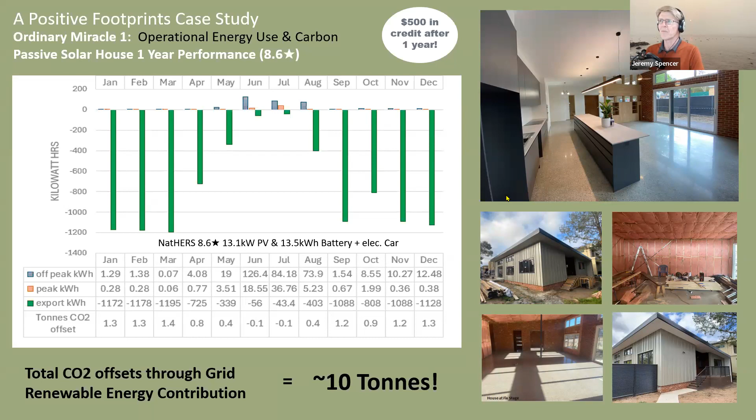For those who didn't see part 1, this is the case study home and this is its operational performance. As a quick refresh, this is an 8.6 star passive solar home. It produces more power than it uses, it's $500 in credit over the year and offsets 10 tons of carbon dioxide, basically by minimizing demand, welcoming in the sun during winter, keeping it out during summer, and then putting photovoltaics on top. That's what we went through, how to do that in a cost-effective way, and how to use the SBA website, where the tools are located for you to also do that if you're not already. They are relatively easy steps to follow.

The takeaway for me from last week, when I saw this, it sort of changed how I see what a net zero home can be. A net zero home for me now, just a refresher from last week, is a resilient home. This house produces so much power during the day but pulls very little from the grid at night. Effectively, there could be a blackout, and this house could go for days or weeks for most times of the year. Maybe not in the middle of winter, but most times of the year this house would be producing enough power to run itself without being a big demand on the grid when the sun goes down, because of its battery.

I see net zero homes as potential energy hubs during blackout times, where they can supply power to not only cars but neighbours' houses as well. I see net zero homes as low cost living lifestyles.

So instead of the average $2,228 in Victoria for a dual fuel home, this house is $553 in credit. And that doesn't count the $300 a year or so that it saves by not being connected to gas, and also the $800 a year or so that it saves by charging its electric car. So these numbers start to add up to some handy pocket money.

And lastly, a net zero home has a carbon negative footprint, offsetting 10 tonnes of carbon dioxide by putting excess power into the grid so that fossil fuels don't need to be burnt for that power to go into the grid, and in that way offsetting 10 tonnes instead of the average home, which creates 5 tonnes every year.

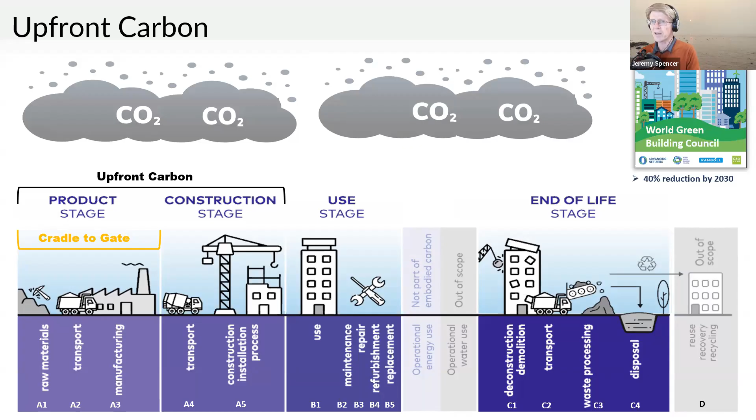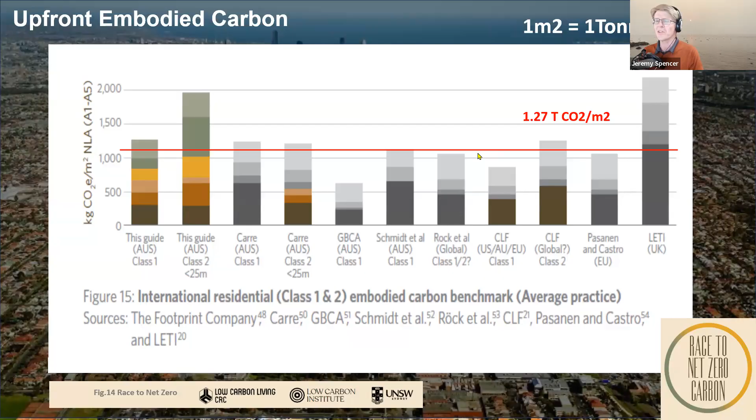And that's really because this life cycle analysis industry is still quite new, and the industry is trying to tie down what protocols, what data, and what methodologies are going to be used. But as a rule of thumb, as a working rule of thumb at the moment, until I know better, I go for this: 1 square metre of house is approximately 1 tonne of carbon dioxide. So if you're not doing any calculations, but you just want to get a basic idea, that's not a bad one to use on site when you're looking at plans.

Now today, I'm going to be using - I like this database. This is a free carbon coefficient database, which looks at products and the amount of carbon dioxide that they use, typically by weight. I've worked with this database quite a lot for the True Zero Carbon Challenge, the Design Matters National True Zero Carbon Challenge, where we created a front end to work with that database and allow us to run the challenge and produce reports.

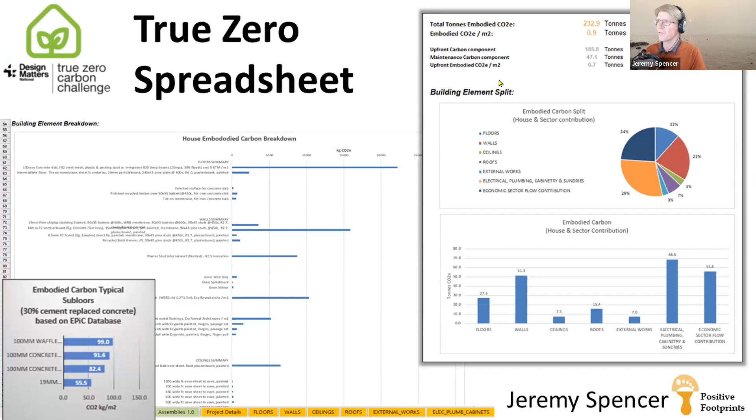Now, this is not the house as built. This is what I'm calling the base case home - one that uses the standard materials in the Melbourne suburban environment. So most houses around here are built with new brick, and they'd be built with virgin concrete, and probably for the floors we'd have carpet in the bedrooms, tiles in the wet areas and the living areas. You can imagine this house - the actual house form stays the same, but I'm just substituting in those materials. The reason I'm doing that is so that I can show you, as we go through this and apply some of the strategies to lower embodied carbon, how this relates to more standard construction.

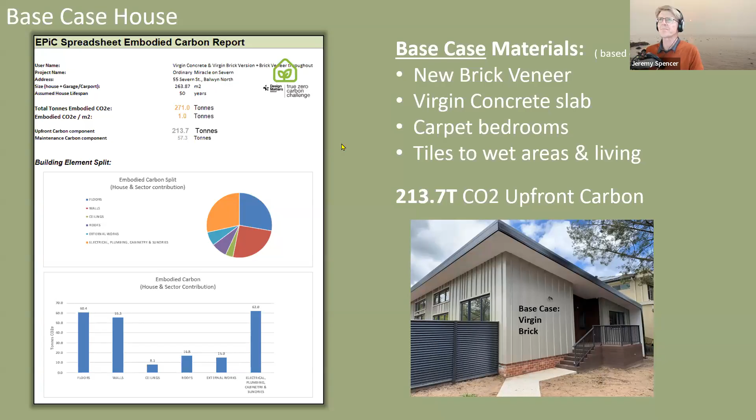On the report, once I've inputted everything, this is 213.7 tons of carbon dioxide for this standard house. This is how we break it down.

We've got floors here, around a bit over a quarter of the embodied carbon goes to floors. To get an idea of this particular house, it's a reasonably complicated flooring system. We had a sloping block, starting at the high end with a slab on ground sitting on piers, a waffle slab. As the ground sloped away, the owners wanted the house to be all single level since they were elderly. So we've got a brick strip footing, double brick over concrete strip footings, and running up the middle, little brick piers with I-beams over the top, which carries a Bondek slab over the top. There's also one other concrete section, which is a slab on ground.

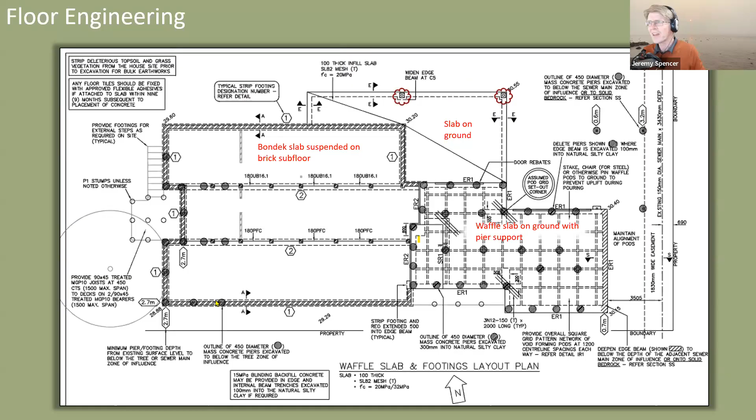We saw it in part one. This is thermally broken because it's actually on the outside of the house with a deck over it, and that was sloped so we could try and stop what was a drainage issue on the site. We had water that would sometimes run down the hill and flood the house, so we didn't want to create a deck with a space where all that water could sit and stagnate and need pumps and so forth. So we put a sloping slab to slope it away. Anyway, that's the flooring situation in this house.

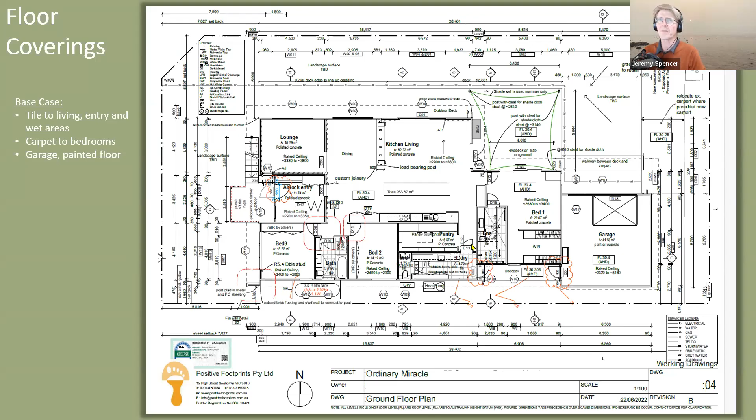On top of that subfloor, for the actual home, we end up doing polished concrete, which we'll look at. But for the base case, this includes tiles to all the bathrooms, tiles to the living area, and carpet to the bedrooms, which is what a standard house would have. If you're looking at standard homes, that's probably what they'd have, plus a painted garage floor. That gives us our embodied carbon for our floor of 60.4 tons.

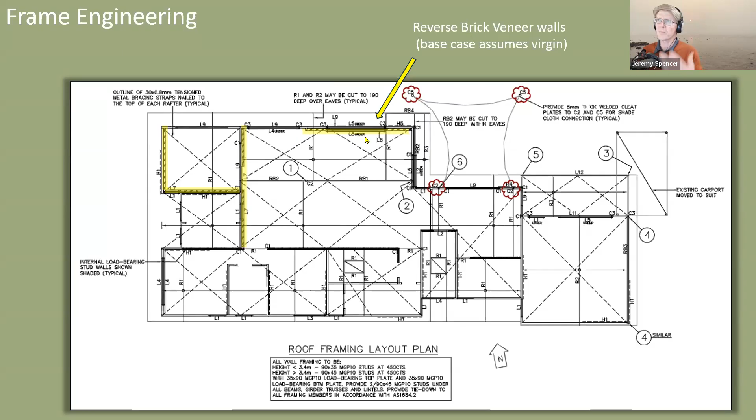Walls, 55.3 tons - again a big quarter of the embodied carbon in this home. These are probably pretty similar for most homes, so if you want to get a sense of how much embodied carbon and where it is in the home, these ratios are probably pretty similar across most homes. For the walls, we have timber framing throughout this house - that's standard. This house in particular had some internal brick walls, which in reality we use recycled brick, but for the base case we're assuming they would be virgin. We're also assuming for the base case that it would have been brick veneer, so we can see the difference later of changing it away from brick veneer.

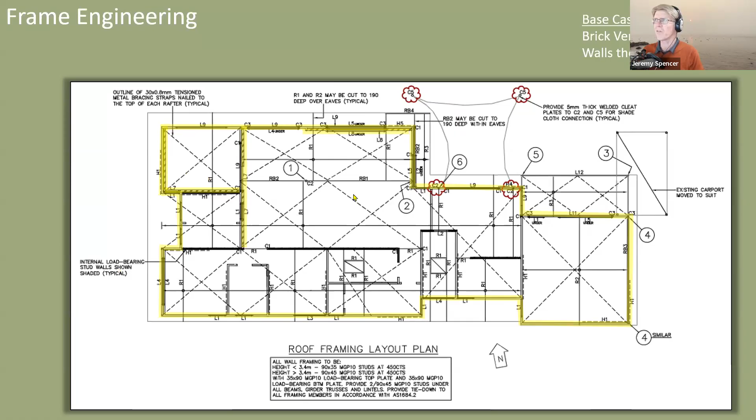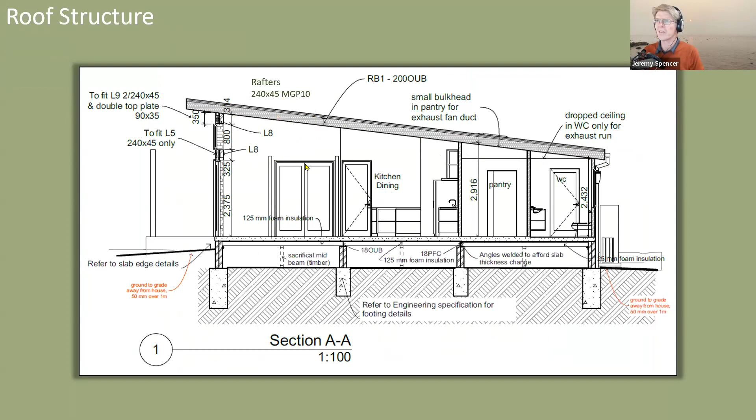Then ceilings and roofs - in the software I split those up because it's easier to enter, since ceiling size and roof size is different, and you can have different materials on both. But as a group, ceilings and roofs is our structure. We just have a flat framed roof throughout, 240 by 45 rafters - can't remember if it was R4 or R5 in that space. Plaster on the underside, metal roof on top. Pretty standard sort of construction there.

Now these four elements - floors, walls, roofs, and ceilings - are what they call cold shell. So if you hear this when anyone's talking about embodied carbon, cold shell just refers to those things. There's more that happens in the house, and you can see the cold shell in this case is about two-thirds of the embodied carbon. We've still got external works, typically not part of cold shell analysis because external works can sometimes be very broad, sometimes small, so they often just seem to be left out.

And also this plumbing, cabinetry, and sundries section. Now that's quite a big section when you put it all together, and includes wires, pipes, lights, switches, plumbing, toilets, basins, and basically all the other bits - cabinetry, bench tops, all the other bits within the home.

Now as far as data goes, you have pretty good data for walls, floors, ceilings, and roofs. But when you get to complex items like air conditioners and hot water systems, there just isn't the data - they're such complex machines. I was listening to a presentation from someone at Daikin, and they were saying that in their aircon there's over 2,000 pieces that come from all around the world, different places, to be assembled.

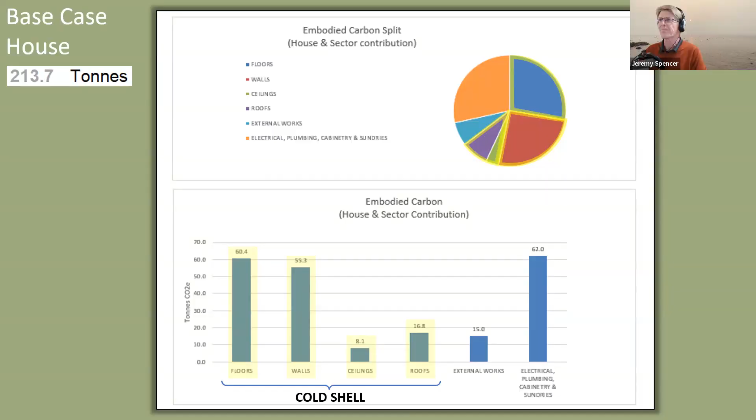All right, let's get into it. Now that we've seen what the house is, let's get into the principles to minimize embodied carbon, which ones we applied on this job, and what savings we got from that.

On our website, step 2 is all about specifying low impact materials, and it's all about embodied carbon. Halfway down the page, if you click on principles to minimize embodied carbon, you'll get a list of principles, and those are the ones we're going to go through now. I recommend you go back later and read properly if anything interests you. There's a lot of links within these to different resources on the internet, and a lot of tips in there. Okay, let's go through the principles.

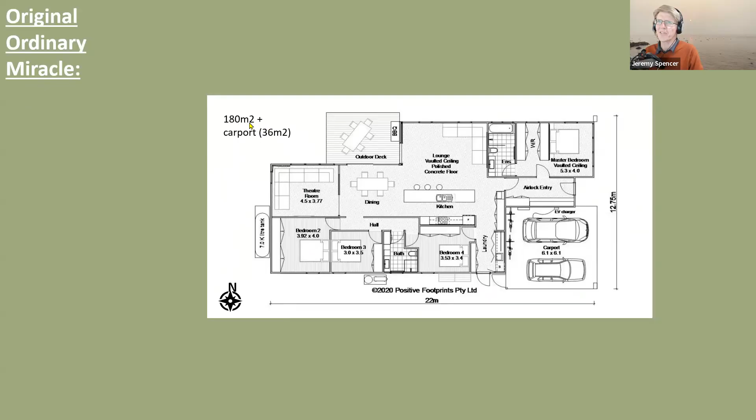Principle 2: avoid building bigger than you need. The clients came to us wanting to install the Ordinary Miracle, one of our Carbon Zero series. In their case they needed to flip it, and they flipped it but also increased it a little bit. The original Ordinary Miracle was 180 square meters plus carport. They enclosed the carport, made it into a bigger garage, and did a bit of pushing here and there on the walls, and before you knew it we were at 263 square meters.

Now, this is how they liked it, and they had some quite set ideas. But as a principle, we want our homes to be as efficient as possible. We want the spaces that the clients want, but we don't need more than that, if you know what I mean. We want spaces that work without having what I'm coming to call 'flabby homes.' I'm finding that's a really useful term—if you're trying to talk clients down a little bit, you can start saying the design is a little flabby.

No one likes flabby design. If I was able to potentially do it again, though the clients—we did have these conversations with the clients, and this is how it ended up, and that's just how it is. But I could see that we could quite easily take a scalpel to this and cut off 0.5 to 1 meter across the top there, maybe across that bedroom, and maybe across the back of the garage. But it's horses for courses, and each client is different.

But if we could have done that, we could have potentially saved 20 square meters or so out of this design. That's approximately 20 tons of savings with our rule of thumb, and maybe $2,000 a square meter—mainly, that's not our square meter price everyone, we're just taking out floor area here. But that's a reasonable saving: 20 by 2,000, that's 40,000. If you do that on a project, all of a sudden you've got a lot of money to put into appliances and PV. We weren't able to do it on this job, but that's the principle.

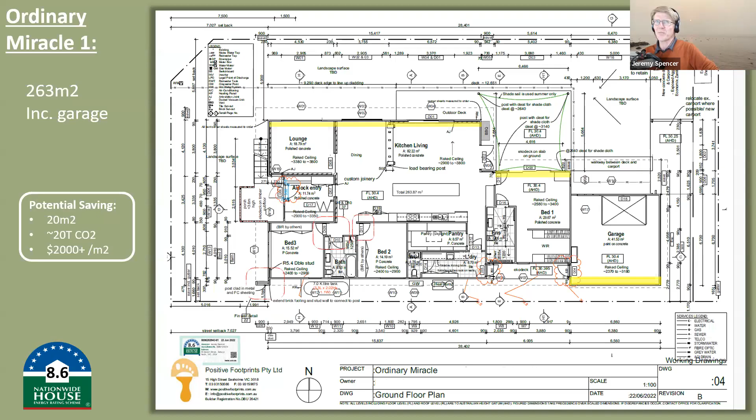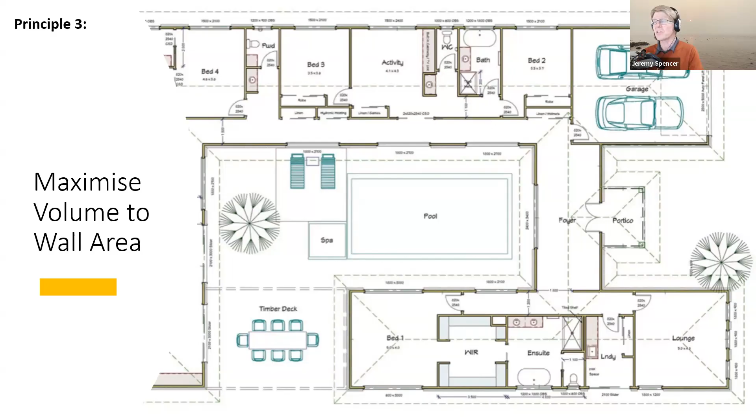Okay, principle 3: maximize volume to wall area. Different shaped houses can have different amounts of surface area relative to the volume they hold. Obviously, a square or rectangle has a pretty efficient amount of floor space to wall space. As soon as you add in a lot of courtyards, you end up with a lot of material for less volume of actual house inside. So one way to minimize embodied carbon is to minimize the amount of material in the house and rationalize the space a bit.

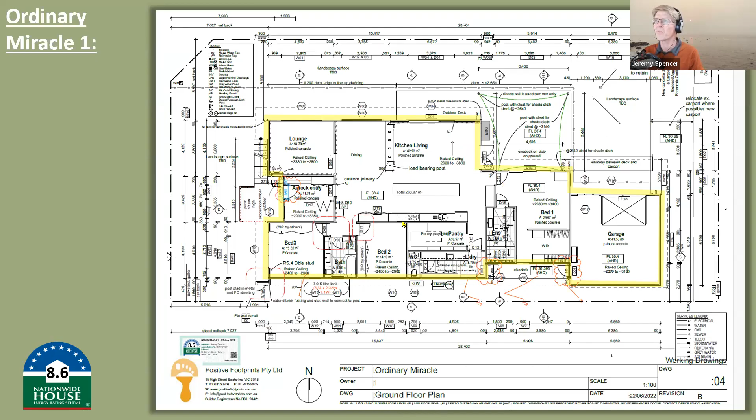In our house—let's see, this is the outside of the house—look, this is reasonably rational design. It does have a courtyard here. That courtyard, however, is facing east, facing the winter sun, so it acts as a light court to warm up in winter when the shade sail is out. I'd say this has a reasonable form factor, so give it a bit of a tick for that one.

But if you had a design with lots of ins and outs, lots of courtyards and turnarounds, it might be something you want to just discuss with the clients. It also obviously cuts down costs whenever you cut down wall area and the windows associated with that.

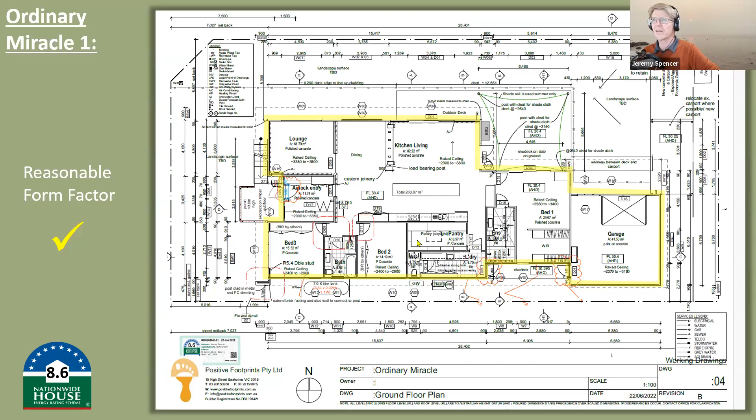It's not necessarily going to save you money. Something like this, in a domestic environment, takes a lot of communication with different trades to get their rough-ins nice and neat. A lot of them are not used to having their pipes and wires on show. So it can be done.

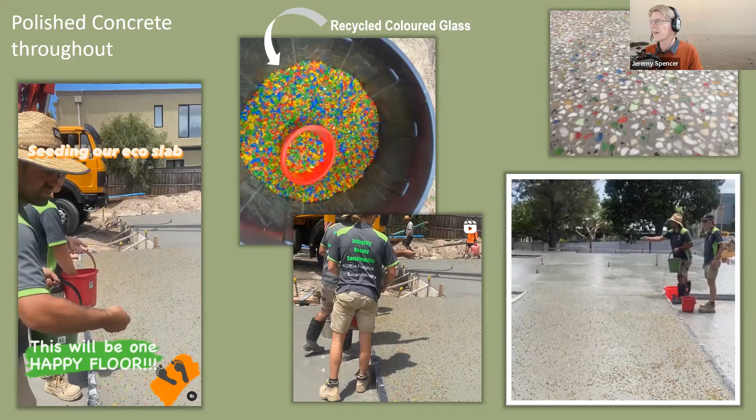In our instance, though, we did something that's maybe easier in some ways, and that is to simply take off the floor coverings against the base case house. In fact, our clients were quite eager to do as much polished concrete as they could. We used recycled glass from Schnipper Glass, threw that on for a happy slab throughout.

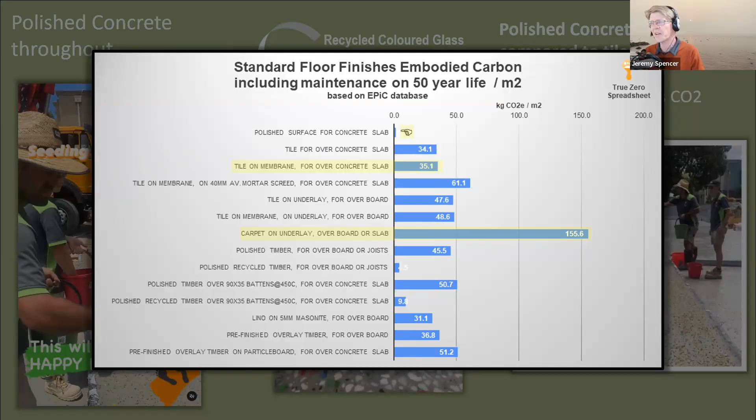That's partly because this iteration of the True Zero Carbon spreadsheet also included maintenance, and over a 50-year lifespan you might expect to change the carpets up to 3 times. So that's why carpets are quite high to begin with, but of course if you multiply by 3 they become quite a lot higher, whereas polished concrete is going to last for basically the lifespan of the house. It might need a rebuff, but that's minimal energy use.

So doing that strategy—minimizing that material, which we did on this house—we gained polished concrete throughout: minus 6.7 tonnes. This is a little tally that I'm setting up, and as we go through, if there are any strategies that we did do, I'll show you what sort of savings we got putting it through the EPIC spreadsheet there.

Principle 5 is reuse materials from demolition. Now in this case, this isn't actually the house, but we often do reuse bricks, and that is what we did in this case.

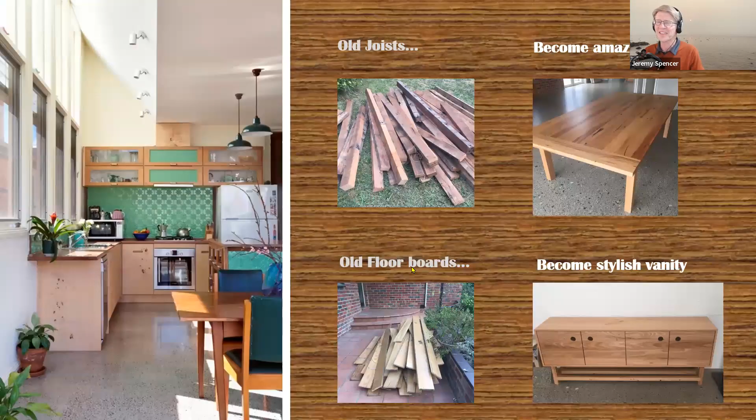Other things you can reuse - again, not this particular home, but for this principle - this was a house where we tried to reuse recycled cabinetry for the kitchen. Came out beautifully. Not necessarily a cheaper thing - in fact usually it's not cheaper to repurpose cabinetry.

But it does cut down on the embodied carbon and can also look beautiful. Some other ideas: we've used old joists to make tables, old floorboards to make vanities. Once again, not a cost-cutting measure, but it cuts down on embodied carbon and creates items that tell a story about the old house, a lovely thing to put into the new house.

Something to consider - not to do every time - but you should always, when going through an old structure that's going to be knocked down, see if there's anything of value. Often we have timber floors, and I always look at the floors of any demolitions to see whether they'll be nice boards when they come out. As long as they're not glued down and in good condition, we can take a little time and take them out, and that's usually a cost neutral exercise.

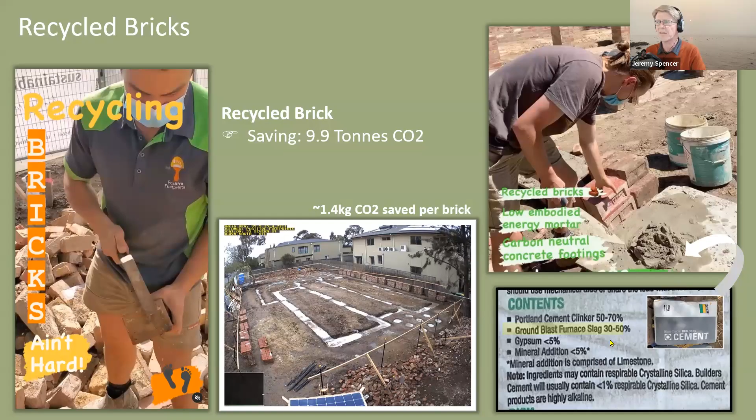The other thing with brickwork is it needs mortar to put it together, and cement is actually a high carbon product. If you search for cements with minimal Portland cement, or some Portland cement replacement - that's the part with the high embodied carbon - using ones with slag, sometimes fly ash, which have a similar bonding mechanism but decrease the amount of Portland clinker needed, on this job we saved another 0.4 tonnes of carbon dioxide.

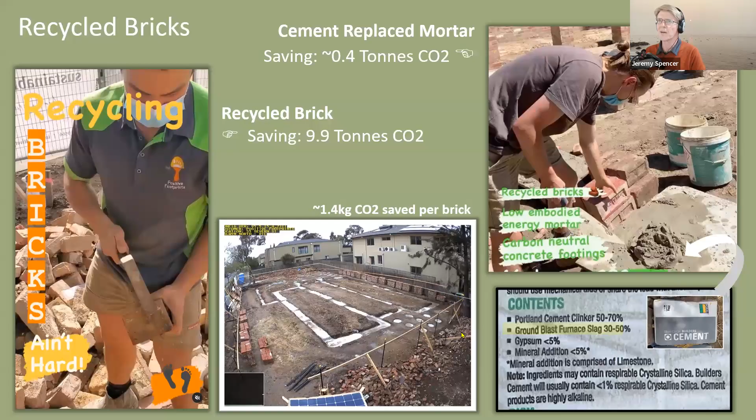So we put that on our tally sheet, and it's starting to add up. All right, what's our next strategy? Oh, there's the fly ash - okay, it wasn't fly ash, it was actually slag, that should say slag. Slag, by the way, is the leftover component from iron smelting. Fly ash is the dust that comes off chimneys when they burn coal. This one was slag.

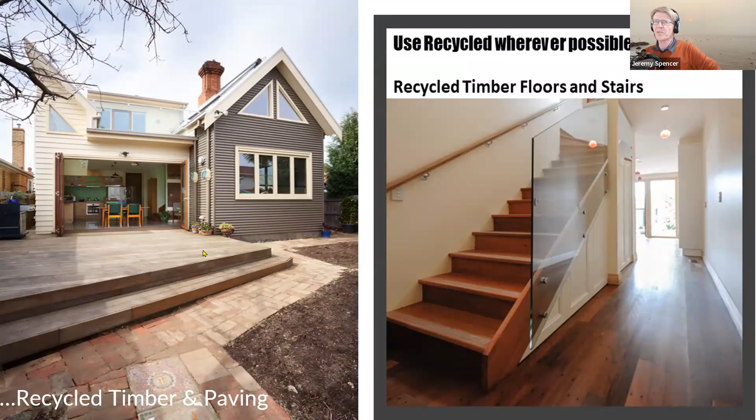And again, recycled timbers you can bring in for decking, stairs, floors - they can look absolutely beautiful. I'd suggest if you haven't done this before, go down and check out the packed lot you might be getting, to see whether it's suitable for your build - nice and even, the grooves and floorboards clean, and the boards the same width throughout.

Especially if you go to salvage yards recycling things, they will know where it's come from. You can often get a bit of history and a story to recycled goods, which owners love to tell later - that their staircase came from so-and-so factory or wool shed or something.

But in our case, we didn't bring in any extras. We simply recycled all those bricks.

Principle number 7: you can also get new materials with high recycled content. If we're wanting to be a sustainable society, we really need to copy nature, and we have to start thinking circular. We have to work out a way that the waste elements from our industries and buildings become the feedstock for new industries. So wherever we can, I like to choose materials with recycled content already in them, because that helps start that circular economy process. It can't all be just a one-way trip to a hole in the ground. That sort of society won't last thousands of years.

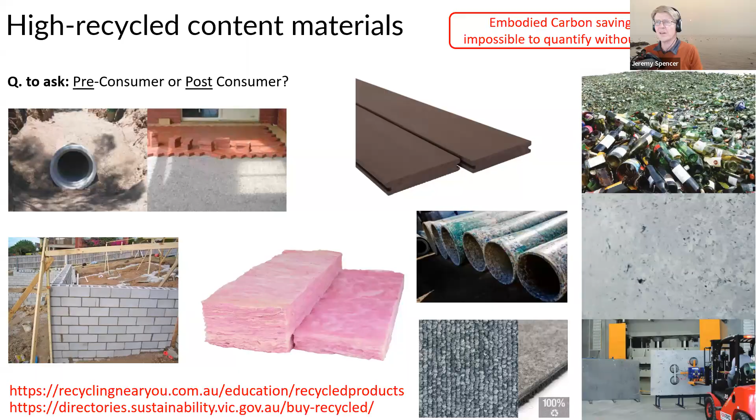How much embodied carbon do we save, however? Well, as it says here, embodied carbon savings, if any, are impossible to quantify without an EPD. Now, what's an EPD, you ask me? An EPD is an environmental product declaration. I mentioned it before, but over the last 5 years or so, a lot of companies have started getting on board the EPD bandwagon, and they're doing this so they can get green stars and work out how much embodied carbon is in their products, typically that cradle to gate component of the life cycle.

But it becomes a really useful way to get two EPDs, say of a brick or of steel or of concrete, and you can compare the two EPDs. Look for the global warming potential factor - I won't go through it today - and you can start to compare apples to apples, because the EPDs follow a protocol and have to be created by a third party following a set criteria so that you can compare across EPDs.

But if you click on 'using embodied carbon data to guide product selection' in step 2, and then click on EPDs, you'll come to a section that explains EPDs. They're a little bit clunky to use if you don't know what you're doing, so this little area of the website will walk you through how to interpret and use EPDs. They'll also link through to epdaustralasia.com, which is the database where all these EPDs tend to be stored.

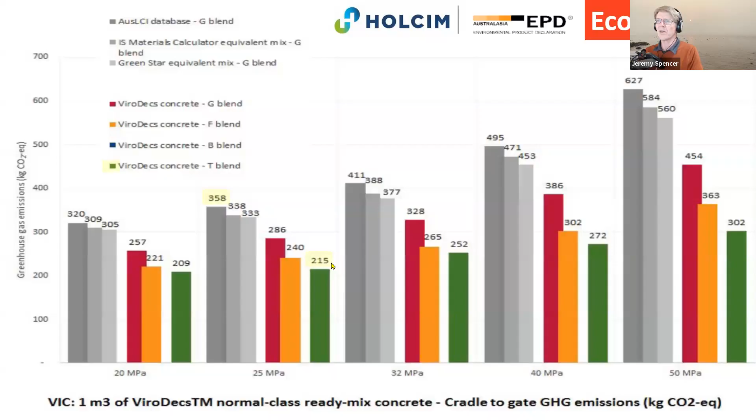Now, instead of standard concrete, we specified their T blend - it's now called EcoPact T blend, not ViroDecs T blend - which is a triple blend. That T stands for triple, and that's got slag and fly ash. So they've taken out some, or quite a lot, of the Portland cement and replaced it with slag and fly ash. And so instead of 358 kilograms of carbon dioxide per cubic meter, it's now 215 kilograms of carbon dioxide per cubic meter. So that's a saving of 143 kilograms of carbon dioxide per cubic meter.

Now that's just specifying triple blend. Now, if you go the next step and specify zero, you can specify EcoPact Triple Blend Zero.

Because they've calculated the embodied carbon in their product, they can then use Climate Active, which is a government program, to get an offset company to offset the remainder of their product, so they're taking responsibility for the embodied carbon. They've minimized as much as they can, and now they're offsetting the rest, so what turns up on site is carbon free, without the carbon debt.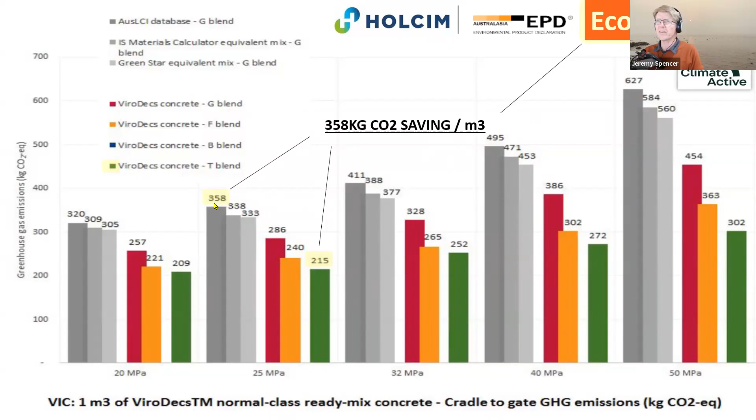So if you choose the EcoPact Zero product, you effectively save 358 kilograms per meter cubed. On our site, just for the strip footings and piers, that was a saving of 10.2 tonnes, which is a lot just for a different specification on the concrete. Just specifying the triple blend instead of the zero gets you 4.1 tonnes of carbon dioxide saving. But it's a lovely feeling knowing you're putting concrete into the hole that is without the carbon price tag.

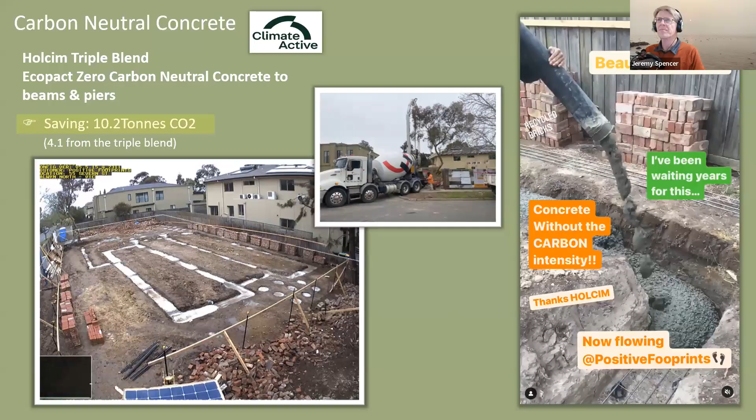Okay, so let's put that onto our tally board. Holcim Triple Blend EcoPact Zero carbon neutral concrete to piers and beams, minus 10.2 tonnes there we've saved.

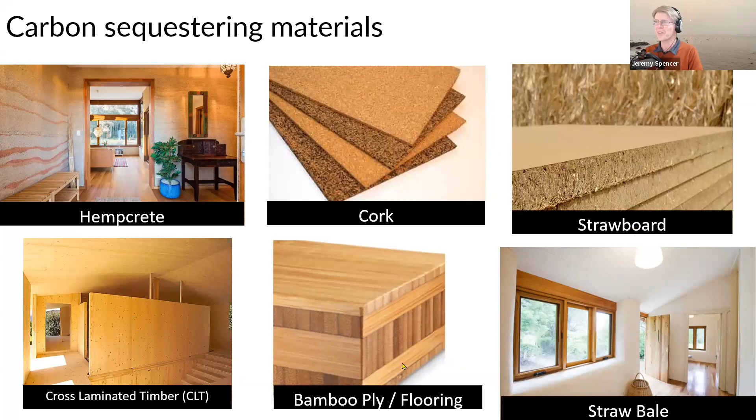And here are some nice materials. We often use bamboo for floors and cabinetry. Cork we've used before, strawboard we're using on an upcoming project. The others I haven't had the luck to use yet. I know Ham's used hempcrete, and no doubt people on this call have used some of the others. So good on you, I love them.

On our job, what do we use for carbon sequestration materials? Well, timber that everybody uses, standard throughout the industry here in Victoria, is pine framing, which does actually sequester some carbon. We used abodo cladding on the outside, and bamboo for one of the feature doors in here. But I'm not claiming any of the biogenic credit in this calculation. If you did want to claim it, it's nice and dry, half the weight will be carbon.

So let's say this door was 100 kilograms, and 50 kilograms of that is carbon. If you want to know how much carbon is in there, these are sort of a rule of thumb way of working it out.

To absorb that carbon, the plant has breathed in 3 times that much. In a carbon dioxide molecule, carbon is one of the elements, and then there's 2 oxygens, that's the dioxide. So carbon is approximately one-third. So you multiply it by 3, 50 kilograms times 3, there's approximately 150 kilograms that has gone into become biogenic carbon, I should say.

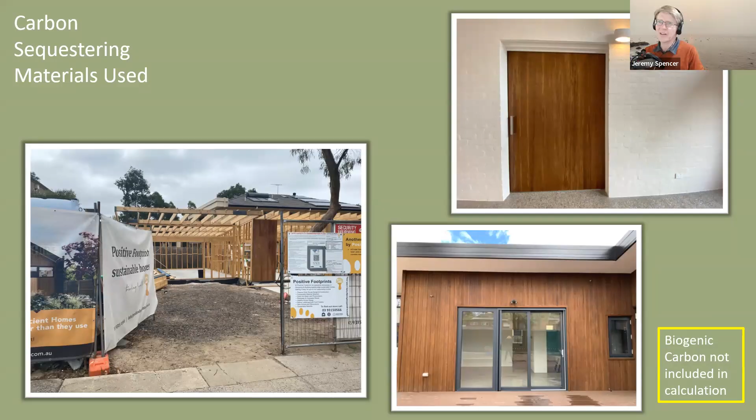But in this instance, we're not including it as part of our tally. But if you did want to add up all the carbon in your house, or the biogenic carbon, that's basically how you'd do it.

And that does bring us a little bit to the idea that embodied carbon isn't the only thing when you're looking at materials. When you're looking at trees in particular, Paul Haar, one of our webinar guests in the past, had a great line that trees are the most environmental and the most unenvironmental things that you can possibly put in your home, depending on where they are sourced.

So there are broader sustainability criteria that you should be considering. There's a whole section on that on the website, with some great resources on general sustainability of materials, and it's actually part of the website I hope to build out in the future.

But one of the elements here, if you are looking at biogenic sources like timber products, and you want to make sure it's good wood, you can click on that, and it opens this document. This was created for Mullum Creek by Paul Haar.

It's a really great place to start if you're looking at sustainable timber. It goes through a whole lot of different timbers and products and what they can be used for, and gives you a nice list of sustainable options. Anyway, something to check out if you haven't already.

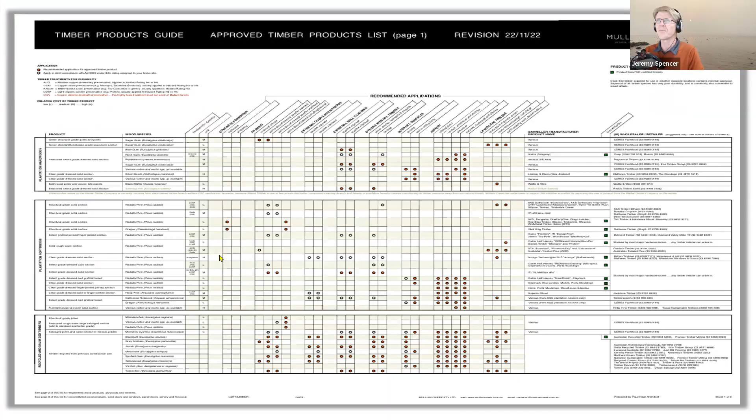Okay, principle number 9: choose local rather than distant, but consider transport type. Obviously the further something comes, all else being equal, it's going to have more transport embodied carbon in it. But it does matter how it's delivered to you.

Now, of course, if there were trucks taking it from the North Island to the South Island in New Zealand, that needed to be added on as well.

While this is a rule of thumb and something to consider if you know what's happened with the transport of the material you're wanting to buy, in general we don't have information about the actual transport embodied carbon unless it's on the EPD. EPDs will have it if they've gone into that part of their A, B, C and D modules for the transport parts, so you can look it up there. But in general, it's a rule of thumb to consider.

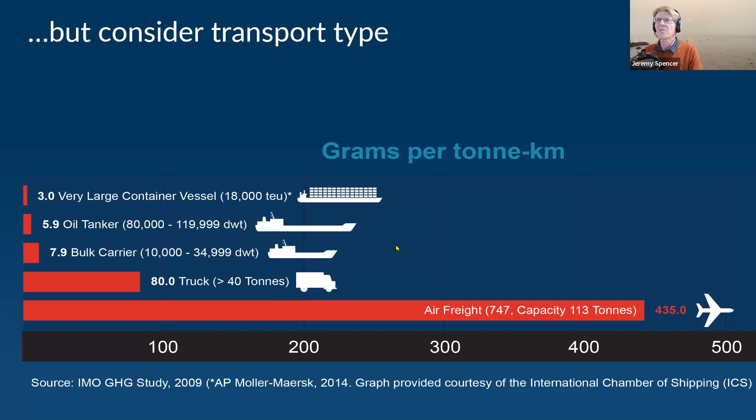How do we use it in this particular project? I said before we use Fletcher insulation. One of the reasons I use it, one, it's a good insulation, but also it's produced at Dandenong, which is quite local to me, and being quite a voluminous product, I don't want to truck it in too many trucks too far.

Carbon savings, I reckon there are some carbon savings of using this versus one that's being imported, but I can't point to it and say how much. So it's not included in this tally.

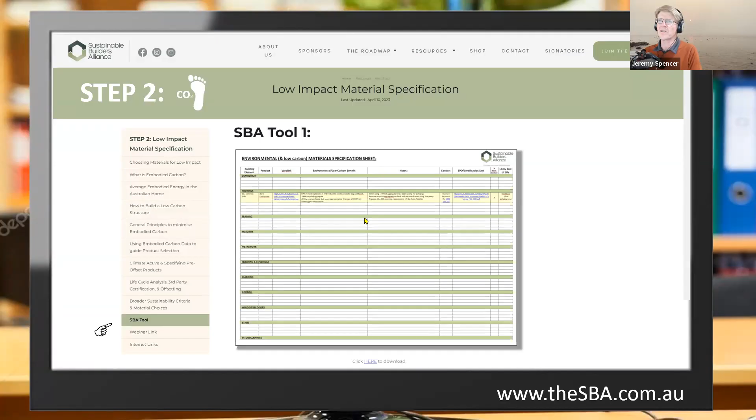I've mentioned quite a few interesting products, and I'd be remiss if I didn't point out that SBA have a tool for recording interesting products - our environmental and low carbon materials specification sheet. I've been using this for years just to record interesting materials that I come across. It separates out into the different building elements, products, contact details, web links, environmental benefits and notes. It's a way of keeping together and growing an environmental specification over time.

When I find a material that looks interesting, I stick it into this specification sheet, and then I might trial it in an appropriate project. If it works, if it's not too hard to install, if it's convenient to use, if it's not too much, then it stays on the list. If not, it gets crossed off. But if you use this sheet or something like it, over time you'll build up quite a comprehensive specification that you use over and over again because the things work. So I recommend downloading that if you don't already have something similar.

And remember, what you specify grows the market and in time becomes the market. So we should be trying to put those hundreds of thousands and millions of dollars of product that we keep specifying year on year into the greener industries so that they become more common.

All right, principle number 10, choose low embodied carbon materials. But how do we know what is a low embodied carbon material and what isn't? Two ways. The first is a couple of rules of thumb. One is that thinner products have less embodied carbon than thicker products. For instance, here you can see this is a different home, but we do have metal cladding on the Ordinary Miracle series and on the house in this study. Steel is pretty high in embodied carbon per cubic meter, but per square meter, because this is only 0.46 millimeters thick, it's quite low in embodied carbon. So thinness and thickness matter.

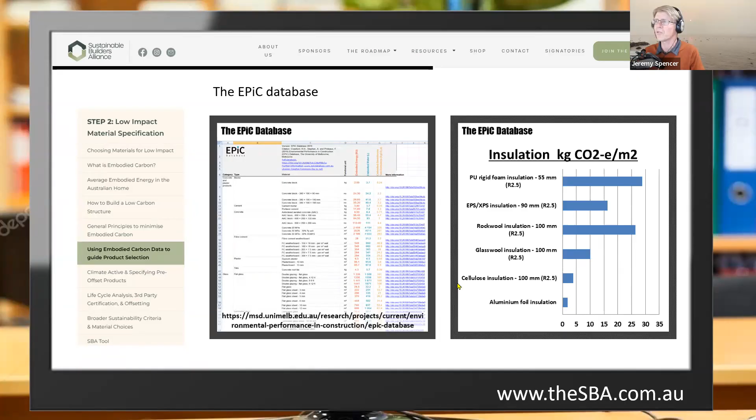So R2.5 insulation, for instance, I was surprised when I saw these two. I always thought rock wool and glass wool were pretty similar products. Rock wool has a fair bit more embodied carbon to it than glass wool. It has some advantages, but that's interesting to note. These are interesting to read through so that you have a sense, when you're choosing and selecting products, which ones have low embodied carbon, which have high. Here's some flooring types - you can even start putting them together with different subfloor assemblies, which I've put together there.

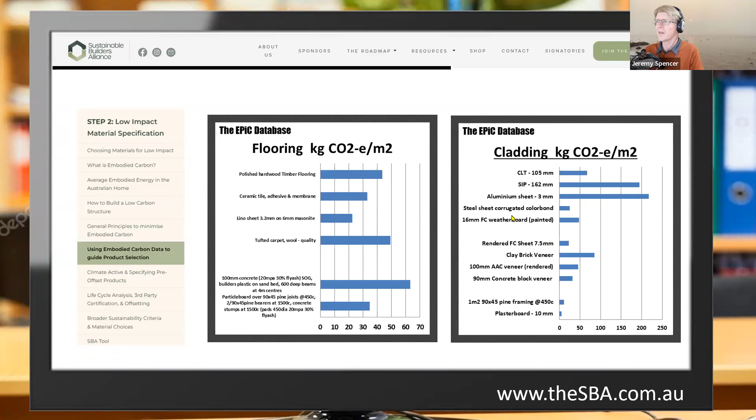Claddings - you can see aluminium sheet, very high in embodied carbon. Basically, it takes a lot of electricity to make aluminium. Whereas rendered FC sheet is quite a thin product - it's an air dried product, so less embodied carbon in that. And structural timber and roofing, you can look at those yourselves.

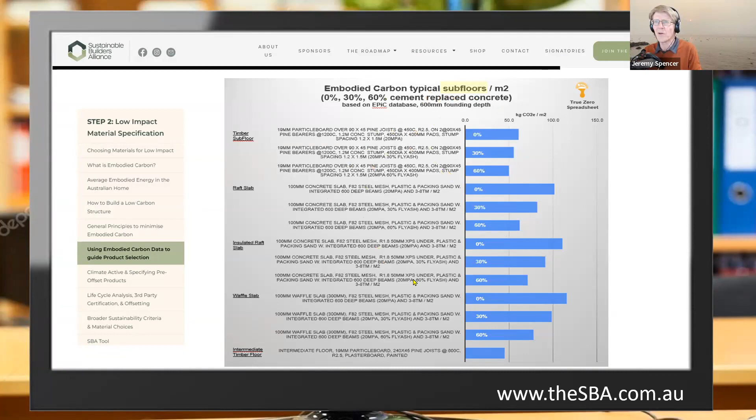If you continue down on that particular section, you get something maybe even more useful - that's where I've put together typical assemblies and given them per square meter. You can see how much embodied carbon is in a typical assembly, and typical assemblies have different cement replacement percentages as well, whether it's a timber subfloor where the cement is just under each stump, or for raft slabs as well. So that's for subfloors.

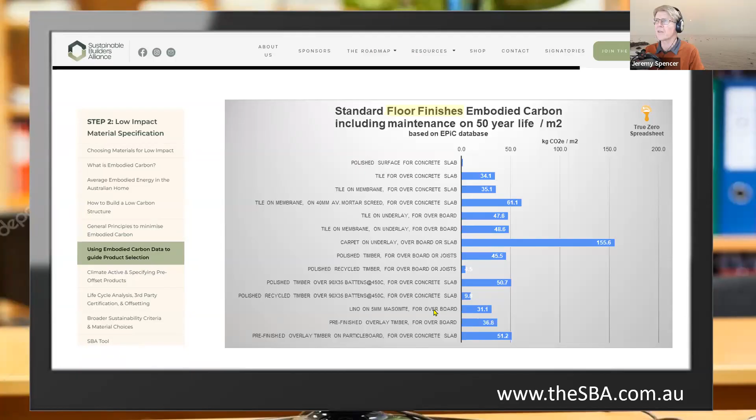I won't go through these, but I'm just showing you what's on the database, on the website, so that you can interact with it and learn yourself. When I first started out, I was referring to similar tables by a guy called Lawson, who had written a book about embodied carbon, and I found them very useful. Hopefully you'll find these quite useful too.

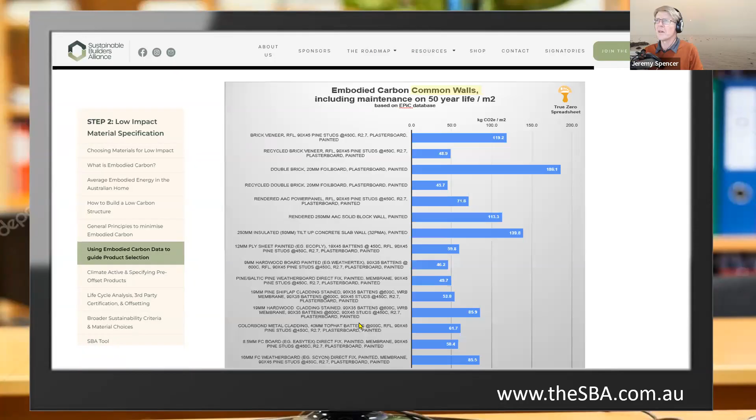Common walls - in our particular case, our common wall at the moment is the brick veneer from the base case, but in fact you can see we use primarily Colorbond and Abodo cladding there. Both of those have a lot less embodied carbon than the full assembly of brick veneer, pine studs, R2.7 plasterboard painted, versus say Colorbond metal cladding, 40mm top hats at 900 centers, reflective foil, 90 by 45 pine studs at 450 centers, R2.7. So a similar thing, but instead of brick veneer, it's now Colorbond. This one's the same, but it's shiplap pine, which is an approximation for Abodo there.

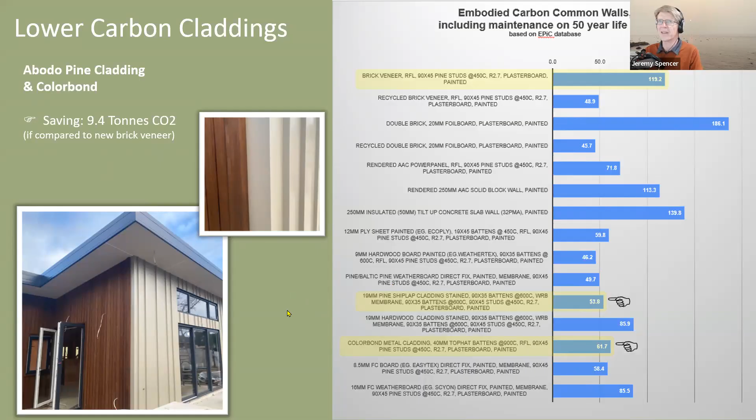Changing those in this particular design from standard brick veneer, we saved 9.4 tons of carbon dioxide compared to new brick veneer, if that's what we were going to choose. I just put that in because that's standard construction in my neck of the woods. So let's put that on the tally.

Choose low carbon claddings, 9.4 ton savings. We're getting close to the end of my tally sheet. Principle 11, last principle: choose companies who provide pre-offset products. This is where I introduce Climate Active. Climate Active is a government program where companies that have taken the time and effort to create EPDs for their products can then go to Climate Active, where they have some verified offset companies, and can purchase offsets through Climate Active, in a more legitimate way with third-party oversight to do offsets.

Now, I know there's a lot of discussion and problems with offsets that have come up in the last couple of years. So it's definitely something one should watch. But I think as a general rule, yes, we should minimize our embodied carbon, and be energy efficient first. But there will always be a leftover component once that process of efficiency is done, and we're going to need a robust carbon offset scheme. At the moment, this is the best one out there. At least it has some third-party oversight, but let's watch it over time.

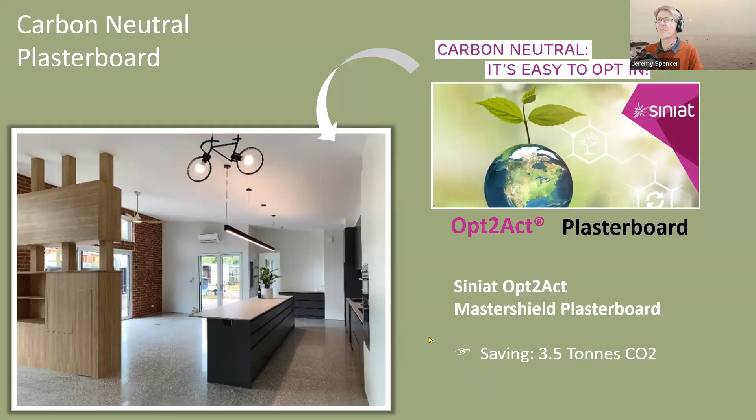All right, so let's put that 3.5 tons on Siniat Opt2Act carbon neutral plasterboard, and we add that up on our tally. As built, we came in at 173.6 tons. That was an upfront saving of 40.1 tons. Now, of course, 40.1 tons doesn't sound big compared to 173, but when you think of 40 tons of gas, that is a huge amount of a waste product going up into the atmosphere and leading to climate change. So I'm still reasonably happy with it. It'd be nice to go further.

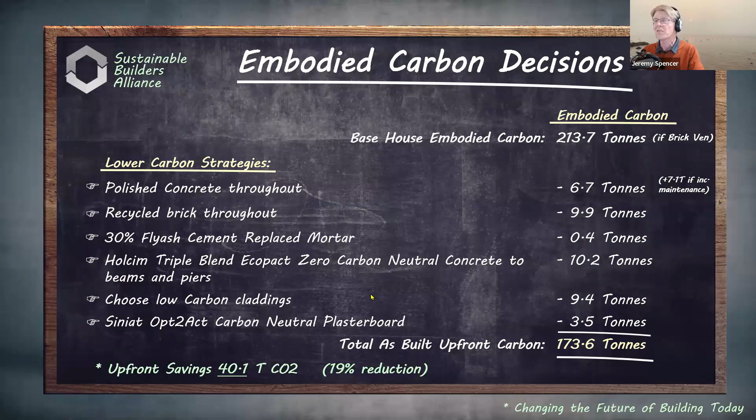There are some things we could have done that I haven't mentioned here, so I'll mention them quickly. One thing: we could have done Holcim carbon neutral concrete, Ecopact Zero, to all slabs. We just put it into the beams and piers, but we're actually doing it on a job coming up where we're putting the Ecopact Zero triple blend into the slabs as well, with a very light minimal grind on them too. I can let you know how that turns out, but I'm excited for that. Doing that on this job would have saved another 13.2 tons. We could have also used Abodo, which was the lower cladding.

We could have used a lower embodied carbon per square meter cladding throughout, in lieu of the Colorbond. That would have given us a little bit of a saving, perhaps a little bit more maintenance throughout the life of the product. So whether or not to do that, but I put it down to show you the options.

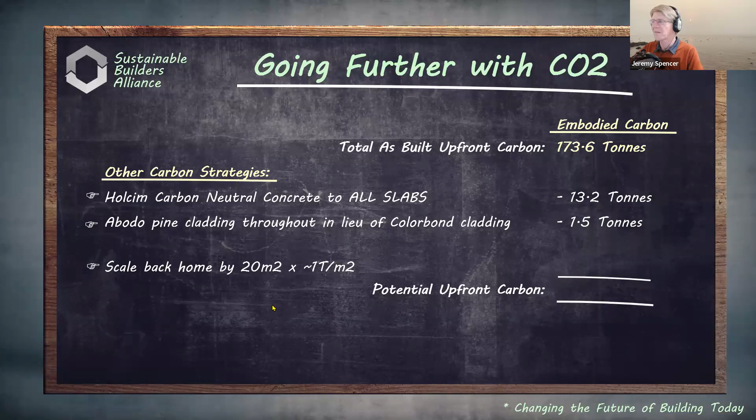And lastly, as we mentioned at the start, where we looked at house size and minimizing house size, we could probably have saved 20 square meters on this house, saving approximately 20 tons as well. That would have taken it down to 138.9 and a saving of 74.8 tons, which is a lot in my books.

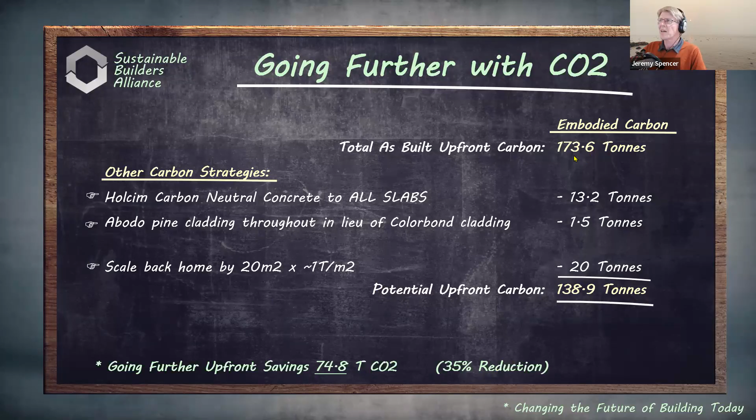But we managed to get 173.6. That was our total as built. So was that a carbon zero home? Is it a carbon zero home?

Well, if we're looking at simple payback, 173.6 tons, and if every year I'm putting enough renewable power into the grid that it offsets fossil fuels being burnt to the tune of 10 tons a year, if we divide by 10 tons, gives a payback of approximately 17.36 years. So if we're just talking about simple payback, I'd say yes, it is a true zero home.

What I particularly like about it is that's within the life of the panels. Panels are warranted to last at least 20 to 30 years. So that's within the life of that solar system that is making that power, which is quite nice.

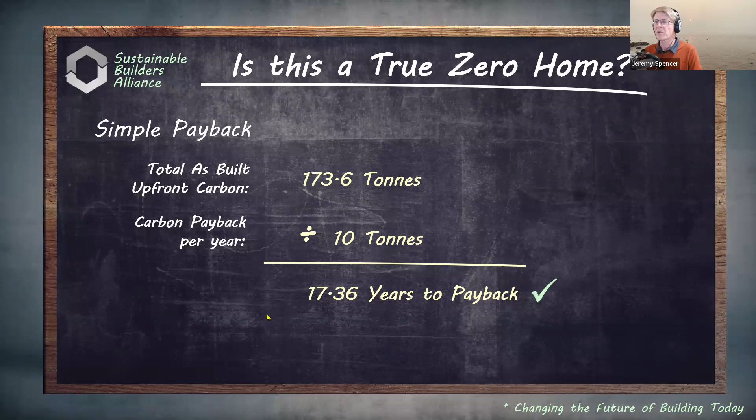So if you're looking for a way to offset your embodied carbon, once you've minimised the embodied carbon and you're down in Tassie, maybe you want to look at planting trees or some other way of doing it. So it's sort of dependent on where you are, whether this is a useful strategy.

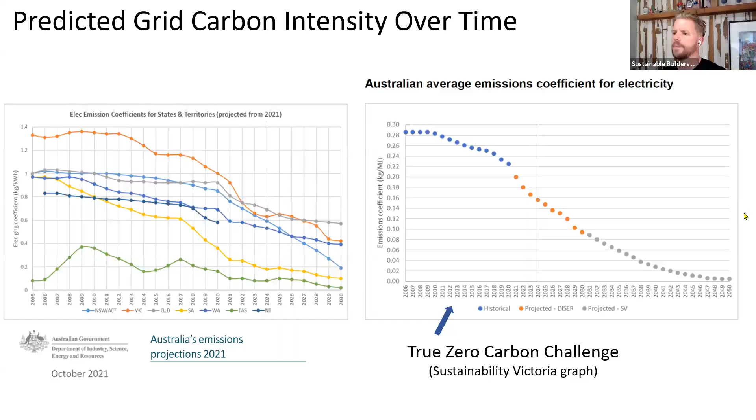Sorry, I went through it in the first webinar, so maybe you could watch that again. But basically it comes down to - you've still got my screen up, haven't you? Can I or not? Yeah, you do. Alright, I'm just going to flick right back to the beginning. Sorry, there's quite a few to go through. Alright, here we go.

Now if you look up the average energy use for an average home in Victoria - a typical average home is dual fuel - so if you put the average gas use and average electricity use together, you get $2,228. So instead of paying $2,228, they're in credit $553. Let's add 500 onto that, so that's about $2,800 that they've saved over the standard home.

Now, not having a gas meter, you save at least around $1 a day not having the gas meter, so that puts it up to maybe $3,100, something like that. And this house, as I showed in the first webinar, also charges its electric car at the house primarily most of the time, and it was able to show that it produced enough power to offset the equivalent of $800 of petrol for a standard car. So you put those things together, and that's how it came to close to $4,000.